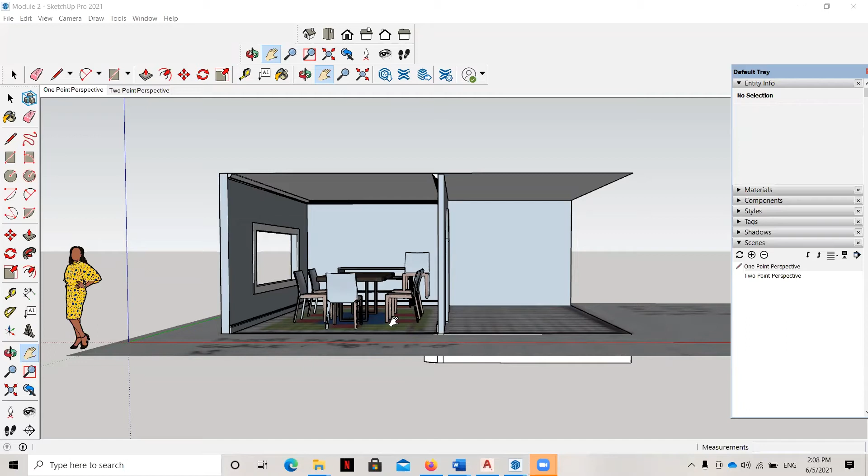In this video, I'm going to teach you how to do the drop ceiling component here.

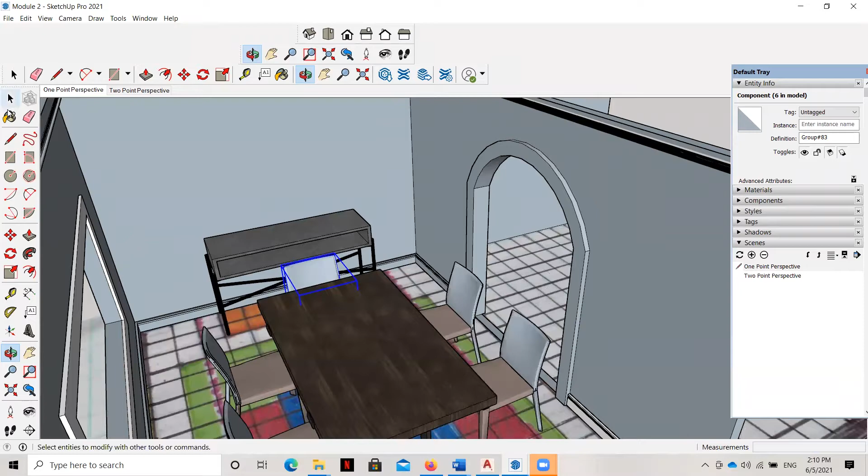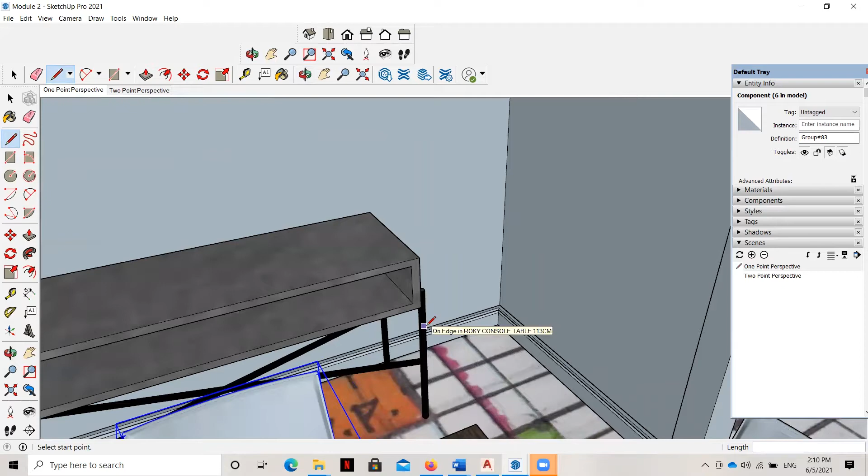We're going to begin by drawing some faces on this back wall. It's going to be a little hard to get a good view, but I'll begin by drawing a line from the face here, trying to bring it up close to where that pink line would hit the back wall. I'll bring that up using my blue vertical. My crown molding's in the way, I could hide it, might be easier, but I'll come back up here, same thing, and click up here, trying to stick to snapping to that blue axis, and end it on that edge.

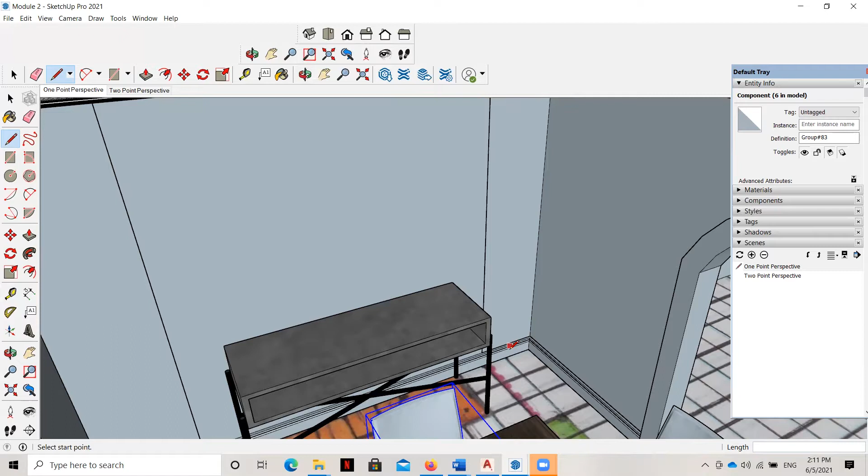Now, the face or finish on this back wall is going to be the same as the drop ceiling, and we have to push pull it just a little bit. But before I do that, I want to take a measurement, because imagine this piece is like a veneer sticking flush to that wall, but it actually has to sit on top of the baseboards. So I have to take a quick measurement of the thickness of that top panel of the baseboard to make sure I don't extrude it too far.

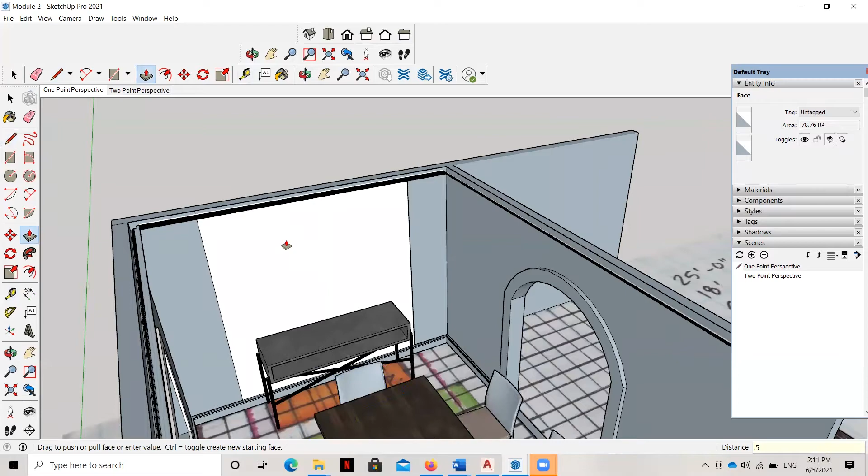The very top of that baseboard is a 1/2 inch thick. So I'm going to push pull now, grab this out and pull it a 1/2 inch. Now it's sticking out just a little bit, you can see it right there.

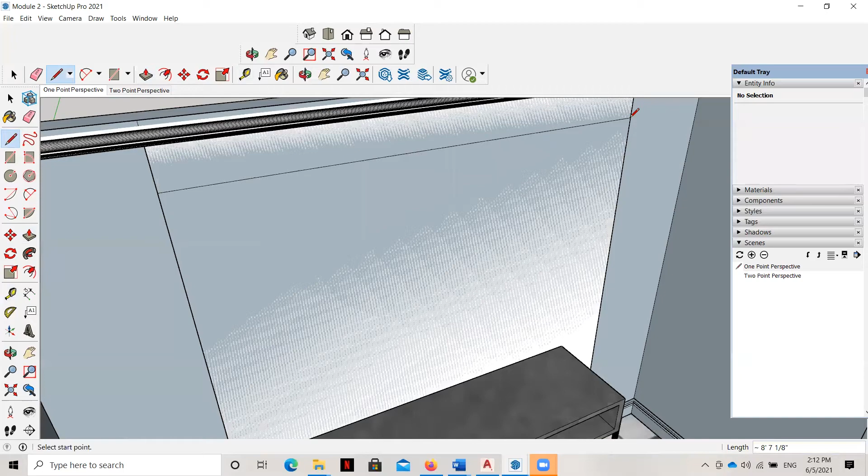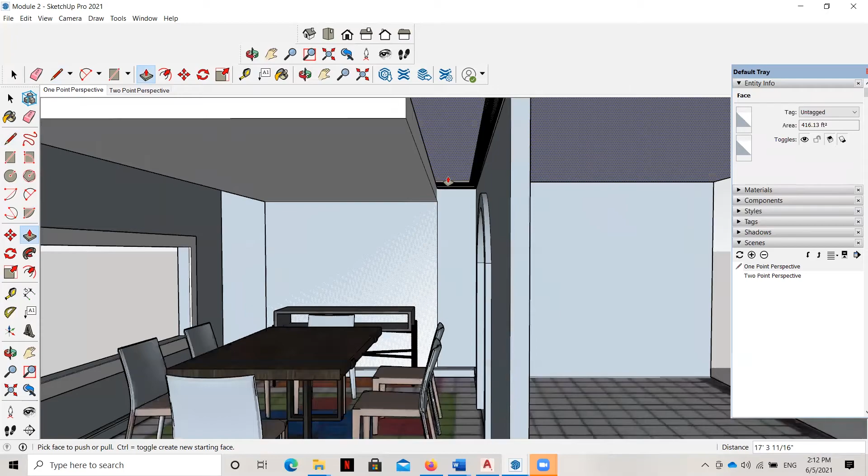Now what I have to do is drop my ceiling here. Remember it comes down, pardon me, only 1 foot for that drop ceiling. So we bring it over on that red axis here, and then push pull it all the way across the room like this. It doesn't necessarily matter where we stop it, because we won't see that part in our perspective. But now in our 1-point perspective, we've got a cool drop ceiling feature happening right here, and it's aligned with that side wall treatment as well. So that looks really, really good.

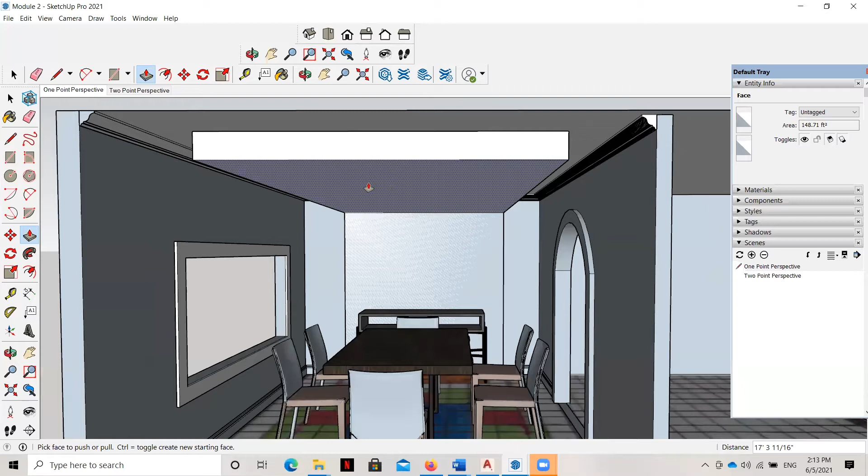Now that we've got that drawn, I'm going to place the pendant light here, and I want to center it over the table. In order to place my pendant light, I need to figure out the center of that drop ceiling, so I'll do it by figuring out the diagonals and then their intersection points. You can see there's the center of my ceiling right here.

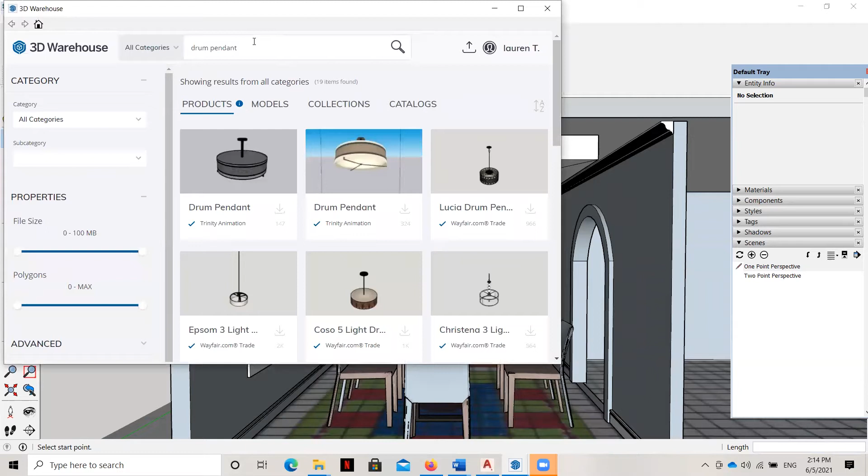Now I want to place a pendant light there. There's a couple of ways to do it. You could certainly try to stick it there, we'll try that first, and if that doesn't work, I'll flip the model upside down, because that's how I practiced it before. But I'm going to go to my 3D warehouse, and I've searched drum pendant. We'll go ahead and put this one in.

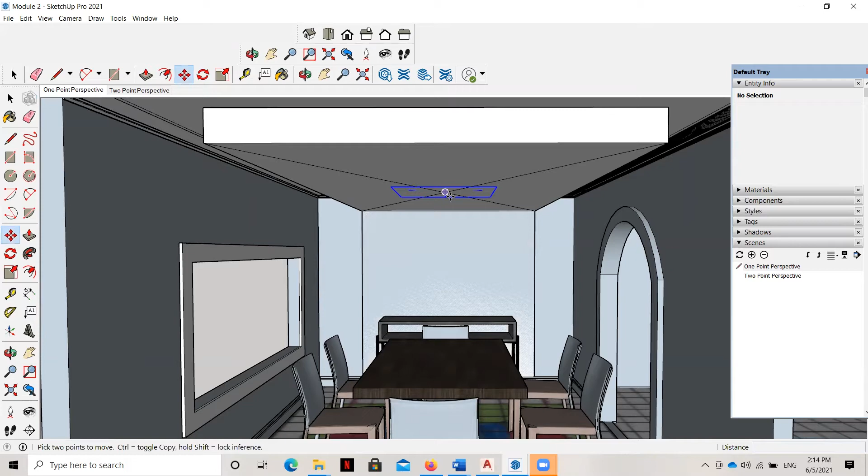My pendant light's coming in, and it's not really sure where it's going to stick. I'm going to pop it in right there, and then bring it down. I'll grab this corner and pull it down on the blue axis. So we've got our pendant light right there, you can see it in our dining room.

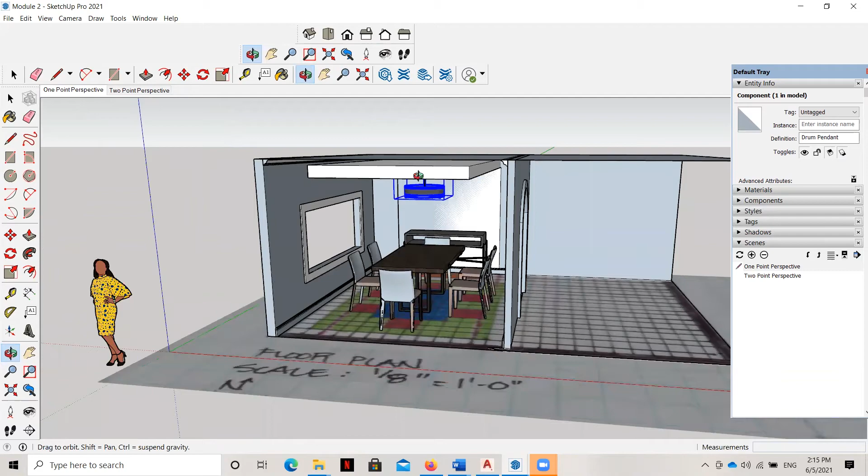Let me go ahead and change our orbit just a little bit. You can see that. And then what I'm going to do now is create that rug real quick too while we're at it, and it's going to be pretty simple as well. I bet you can guess. I'm just going to draw myself a rectangle right here, and push pull it up, oh gosh, 1/2 inch.

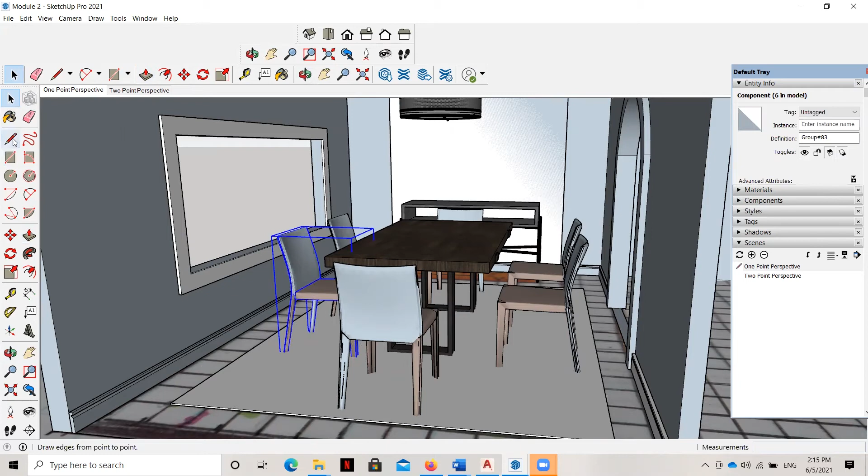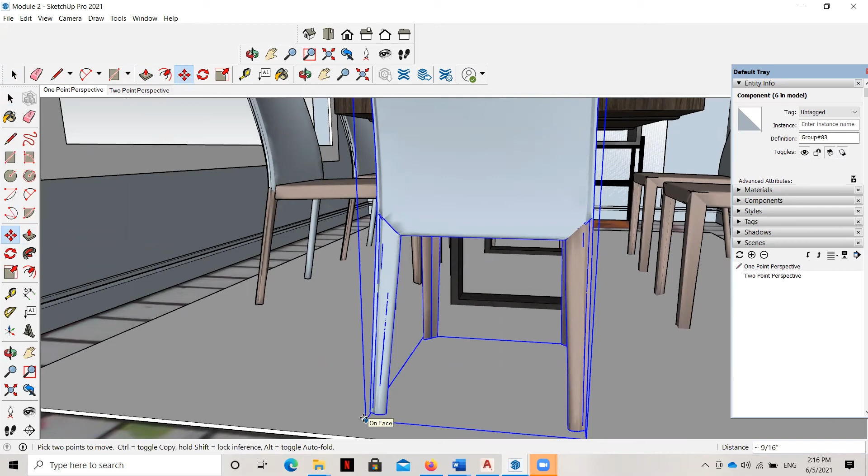Now you can see all of my chairs and my table are sitting in the rug. So all I've got to do is grab them one by one and move them up. You can see here, it might snap up here, I could just grab it just like that, just till I can see the feet. I can grab this too, click it, grab any point on it, and pull it just up that blue axis until I can see the feet. See, it's going to settle right on the face of that carpet.

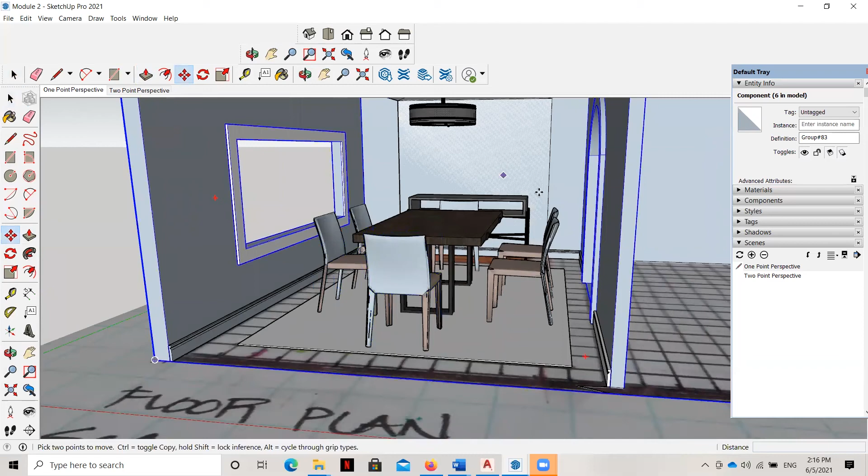We've got to get it moving up, move it just up till you can see the feet. Perfect. So I'm going to make sure that all my chairs and my table are sitting on that rug.

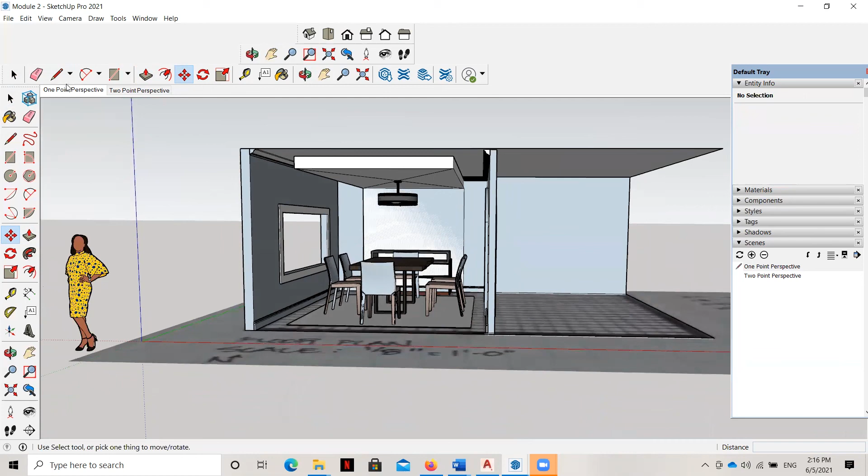You can see I've got baseboards, crown molding, casing around the window. My drop ceiling looks beautiful, my wall finish here looks great. I've got every element here pretty much designed. Let's take a look at our perspectives, so there's our 1-point perspective, and there's our 2-point perspective, just like that.

So what I'm going to do now is pause for the minute, and then we're going to export these views next.